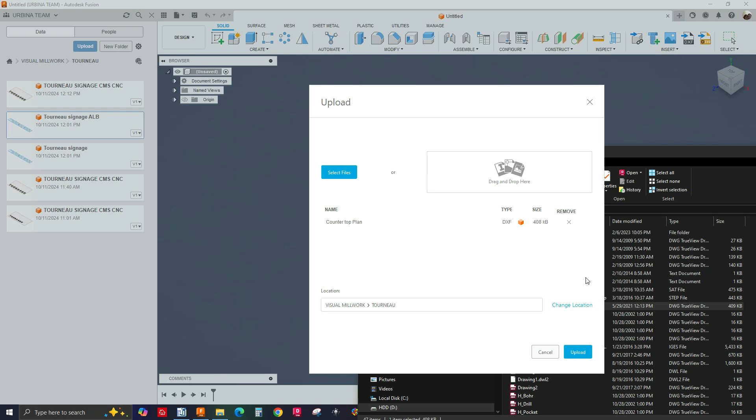Or you can just go to the folder where you have DXF files. I have one right here, let me move this window to the left. You can just drag and drop it, click upload, and you can see it here.

So you've got to give it some time, depends on how big the file is, so just give it a few minutes. You also have to have internet connection for this to work. You can also see it upload.

So I'm going to right click and delete, I'm not going to program that one. I'm going to program this one instead. You can also import DXF files by going to Insert DXF. If you don't see this icon here, you can just click on this arrow and go down and select Insert DXF.

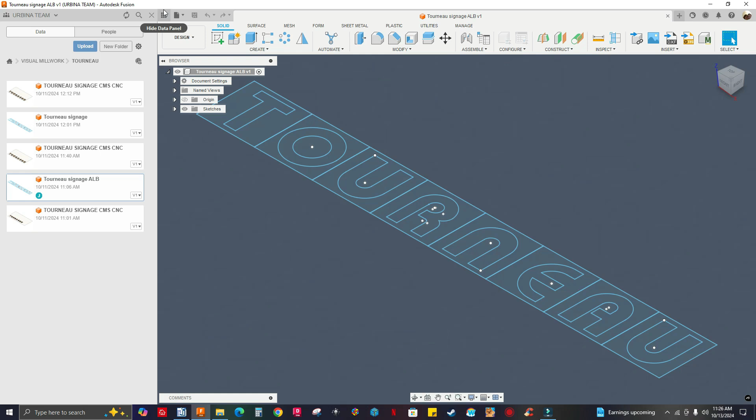Let me right click and open this DXF file. See, it's assigned. The first thing you want to do is right click up here and go down to Capture Design History.

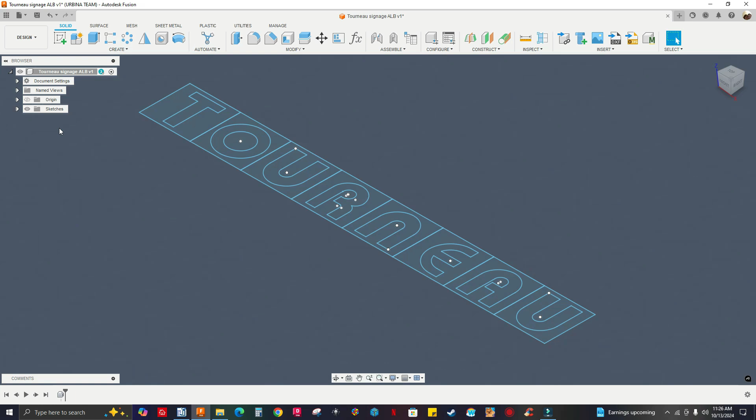Now you have a timeline at the bottom of your screen, see that? Now I'm going to turn this into a 3D model. See, I have the sketch turned on. You can right click and rename this sketch if you want.

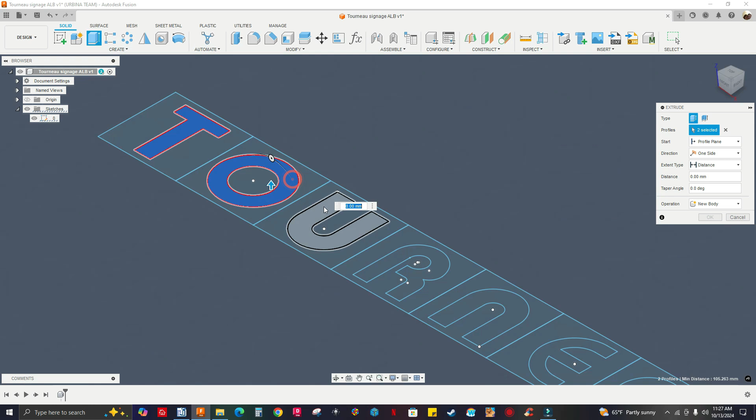I'm going to select extrude, select the T, the O, the U, the R, the N, E, A, U, and make this 12 millimeters, so I'm going to type 12. Operation is going to be new component. Click OK, there's my component.

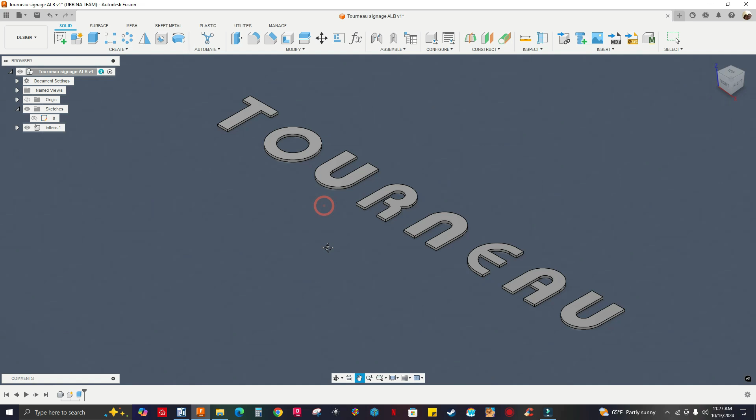You can name it if you want. So I'm going to name this letters, and there you have it.

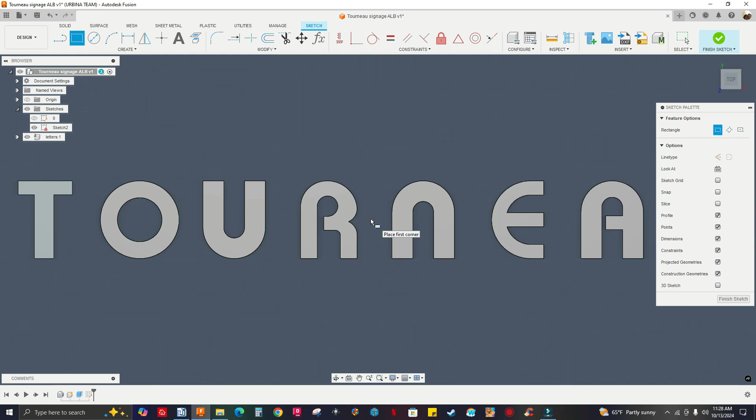Now I want to cut this out of a 12 millimeter MDF, but I want to model the stock. So I'm going to select create sketch, or you can hit the R key on your keyboard for rectangle. I'm going to select this top face of the T, and see, I don't see the letters anymore, so I'm going to hit F7 on my keyboard, and there you have it.

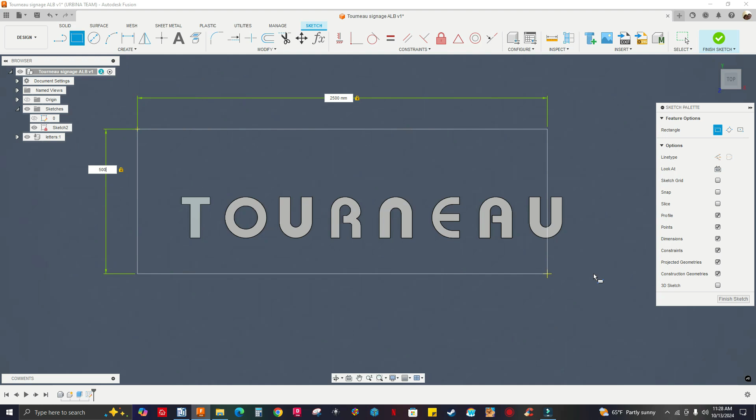I can just zoom out and draw stock here, and I'm going to make this maybe 2500 millimeters by 500, and hit enter. That's the size of my stock, and I can just select this point or drag it down here to position the rectangle right there.

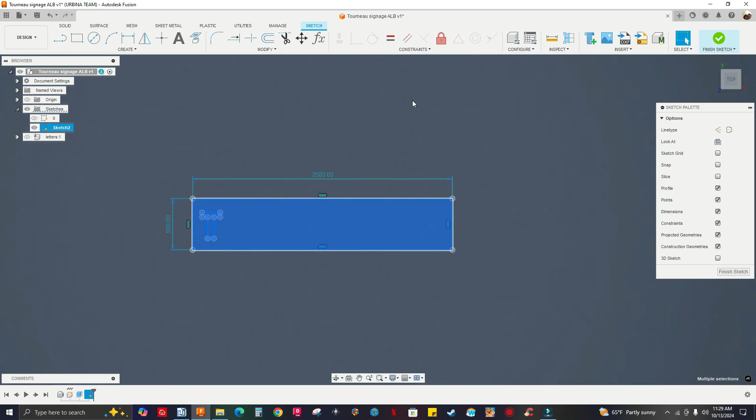Now I'm ready to extrude that rectangle, so I'm going to turn off the letters component, and window select that rectangle, and hit the E key on my keyboard for extrude. I'm going to type minus 12 millimeters. Operation, new component, click OK.

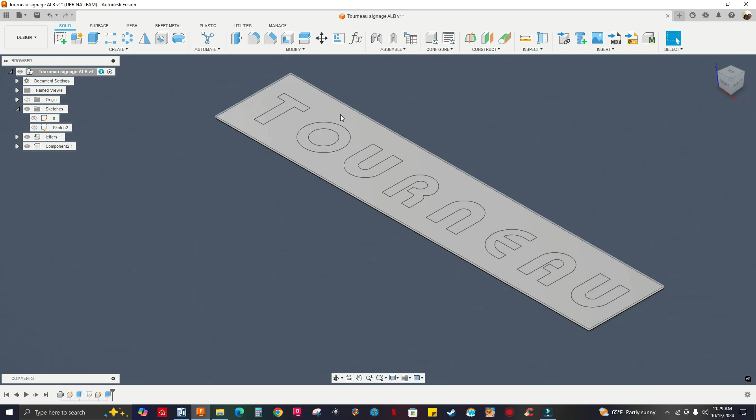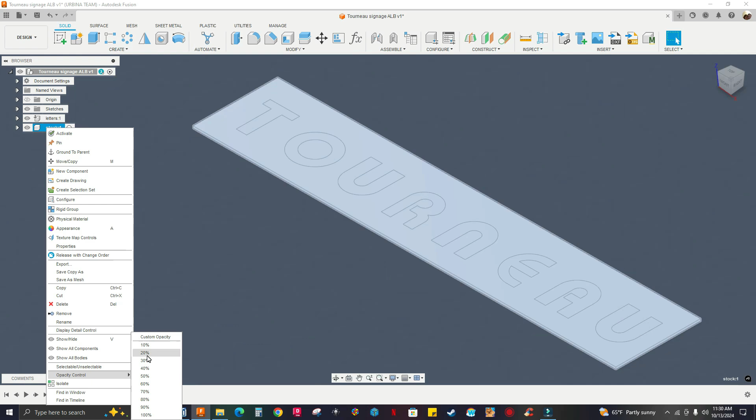You see, now I have the letters and the stock. Select that second component, and I can name this stock. There you have it. If you want to make the stock transparent, select the stock component, right click, go down to opacity control. I usually use 20%.

There you have it, it's transparent. So I'm ready to program this job. I'm going to go to the manufacturing workspace and create a new setup.

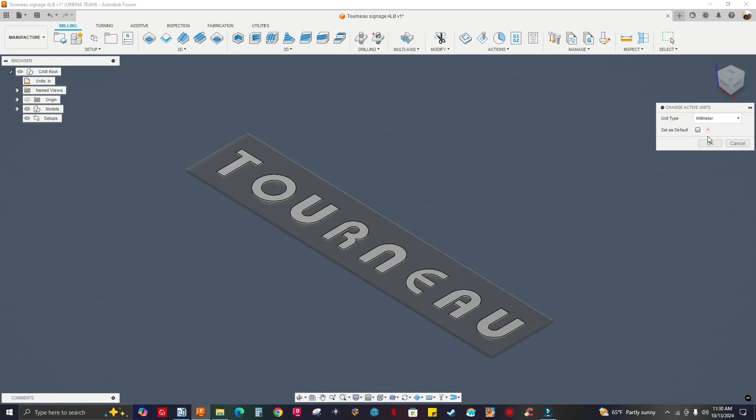Okay, my workspace is in inches. I'm gonna change it to millimeters. Click OK. Select setup to create a new setup.

Operation type set to milling. I'm gonna go down to model, click on select, and select the stock and the letters.

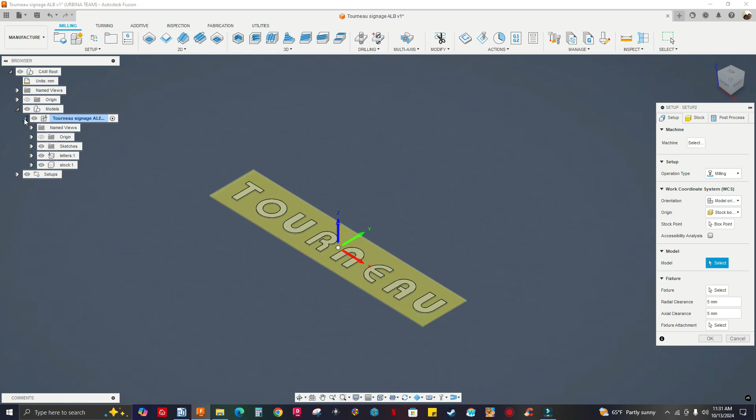The easiest way to do that is right next to models, click on this arrow. Got the components here. Right next to it, click on this arrow, and select letters. Hold down Shift, select stock. So I got everything selected.

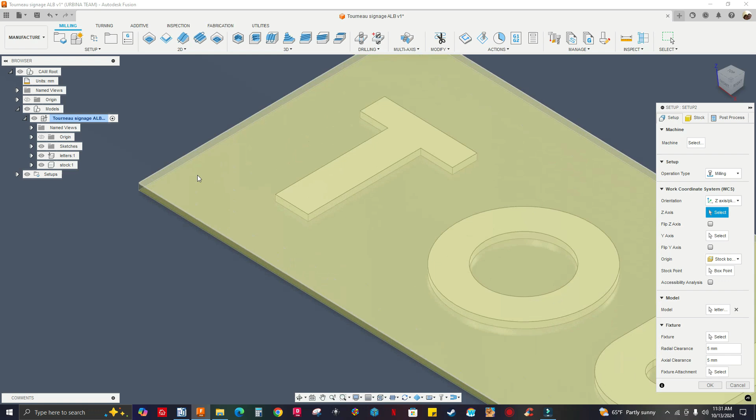I'm gonna go back up here where it says orientation, and select Z-axis plane and Y-axis. My Z-axis is gonna be this face right here with the stock, and my Y-axis is gonna be this edge. Oops, select the face.

Click on this X to clear that out. I'm gonna select the edge here. Go down to stock point, click on box point, zooming in. Select this point right here.

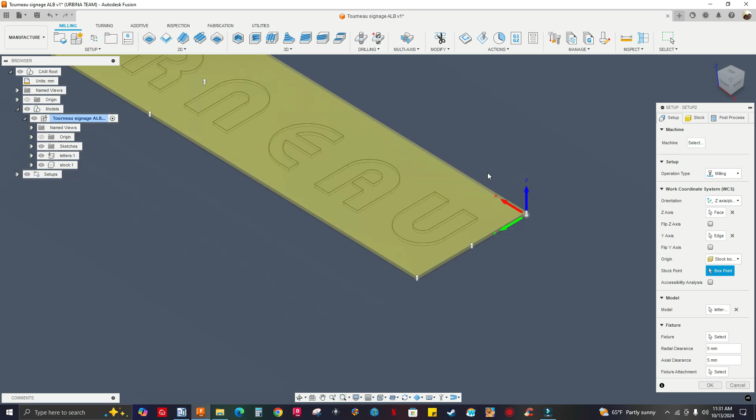But you see how some material is being added to the stock. If you zoom in, you see it's probably like 1 millimeter, maybe a little less. So I'm gonna go to next tab, which is stock. See, I got 1 millimeter, so I'm gonna set size to 0.

Side - see, stock side offset 0, stock top offset 0. Okay.

If you click on these three dots, you can save this as user default if you want. If I click on this arrow, I can select no additional stock. And you can click on these three dots and save as user default if you want.

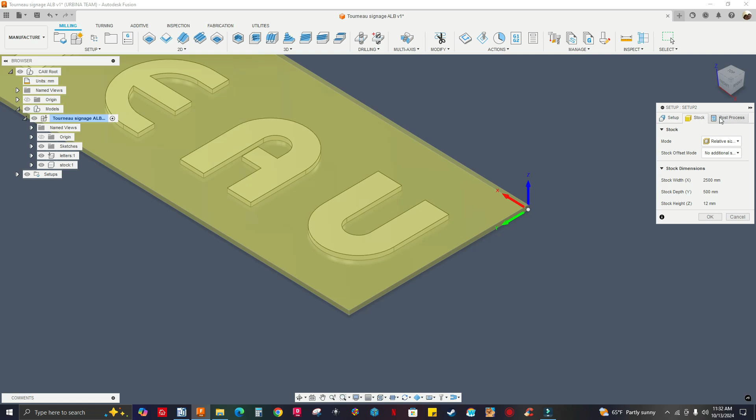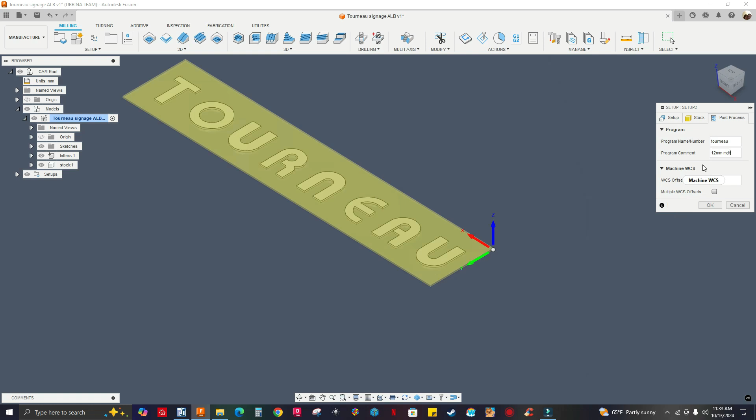Next tab is post process, and this is where you name the program. I can name the program Tourneau, TOURNEAU, and I can put a comment here. I can say 12 millimeter MDF. Okay, and I'm gonna click OK.

This is my setup. Okay, now I'm ready to create a toolpath, and I'm gonna use a 2D contour. I'm gonna do a profile cut. I'm gonna cut the letters out. So I'm gonna go to 2D menu, 2D contour.

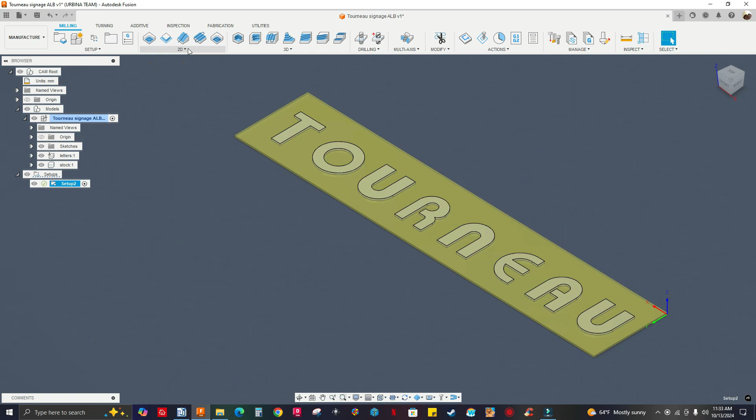I'm gonna select my tool. Okay, I've got the Weeke. I also have - never mind. I thought I had the metric Weeke Optimat BHC 350, but only have inches. So that's why I'm gonna select a 3/8 compression tool.

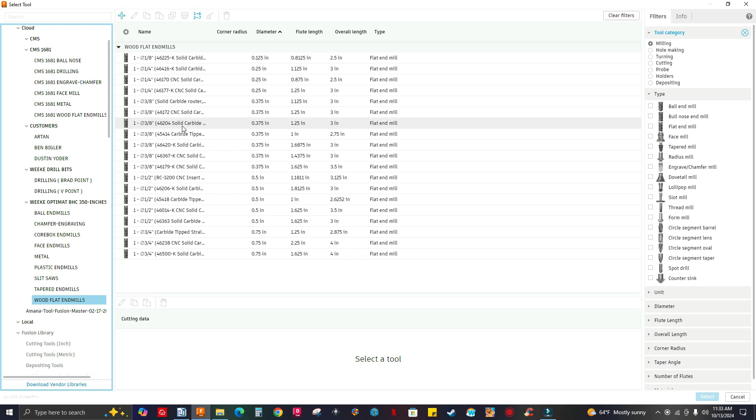I'm gonna select this guy right here. I got all the feeds and speeds set up for that tool. So I'm gonna go to geometry.

I'll have to select the geometry, right? All the letters I want to cut out. But you see, I can't do that because I have the stock component turned on. So I got to turn that off because it gets in the way.

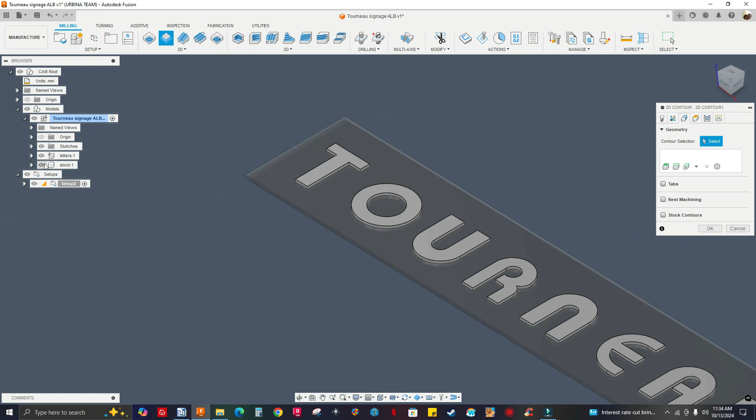So I'm gonna go here where it says stock. Click on this icon, you see like the eye icon. And see, I just turned off the stock.

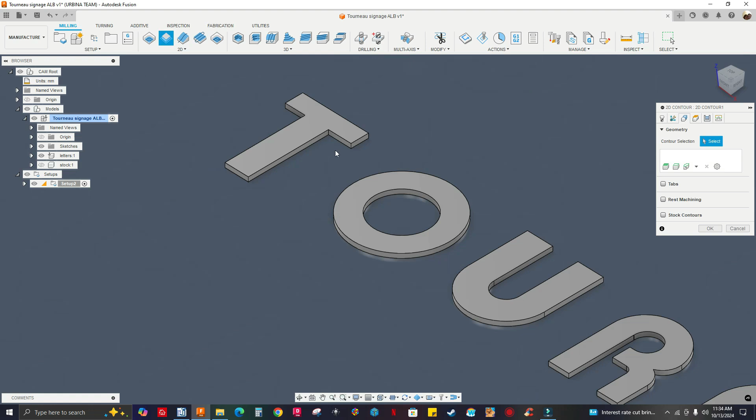I'm gonna select face contours. You can also select chain if you want, you can do that. Actually, click on cancel - you can just select each profile like that, one at a time if you want. But the easiest way to select everything is by selecting face.

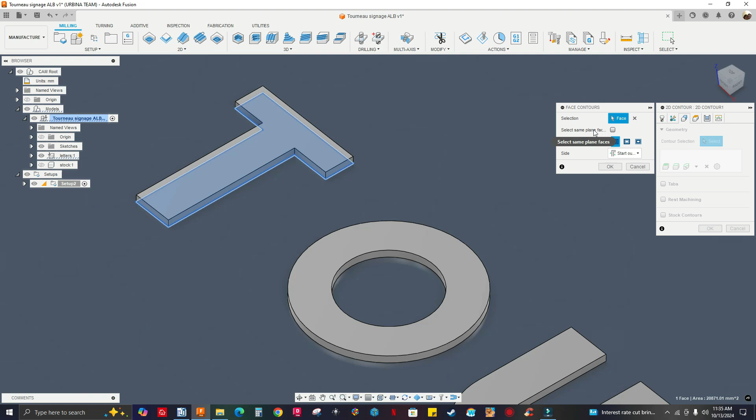I'll show you. So I select face contours, and I'm gonna rotate the model. Select this bottom face. Okay, and see where it says select same plane faces, I'm gonna check on this box. See, selecting everything else, but I don't want the stock to be selected.

See that? So see, I have all loops selected. I'm gonna go to outer loops - that's not what I want. Inner loops - that's what I want. I just want the letters to be selected.

Okay, and see, you have different side modes. You have start outside, start inside, always outside, always inside. Okay, so I'm gonna click OK.

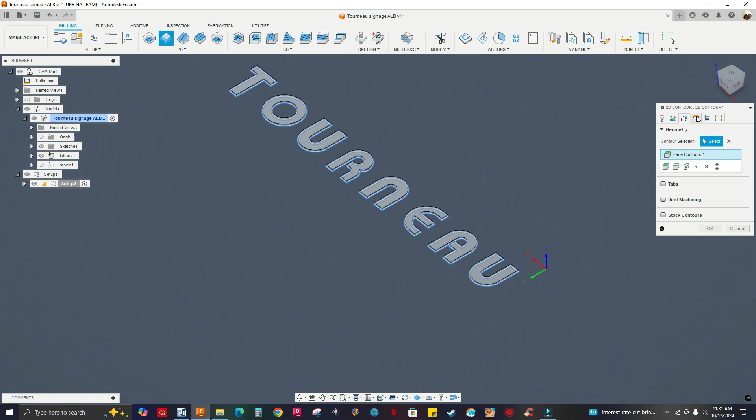Next tab, heights. I want to cut through, say I'm cutting this on a flat table, Homag or Weeke CNC machine. So I'm gonna go half a millimeter, type minus 0.5. Okay.

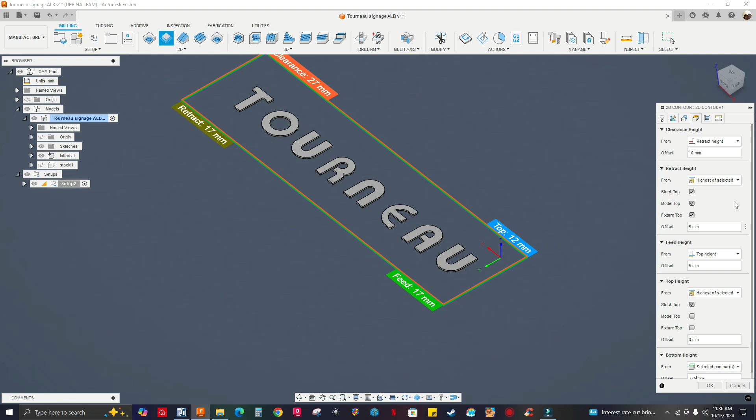Okay, so under passes, I'm gonna hit a step down. So multiple depths, check the box, and I'm gonna have a 7 millimeter step down. Finishing step down should be the same, 7 millimeters. Okay.

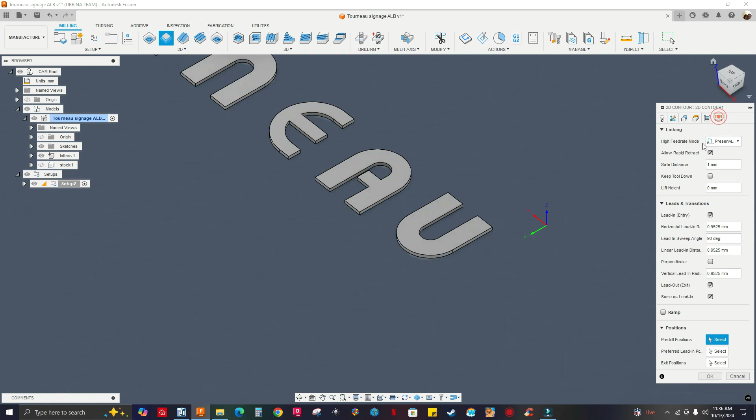In the Linking tab, I'm gonna uncheck lead in and lead out. I'm gonna use a ramp, a 15-degree ramp. Ramp clearance I set to 2.5 millimeters. I can make this 1 millimeter. I'm gonna click OK and see what we get.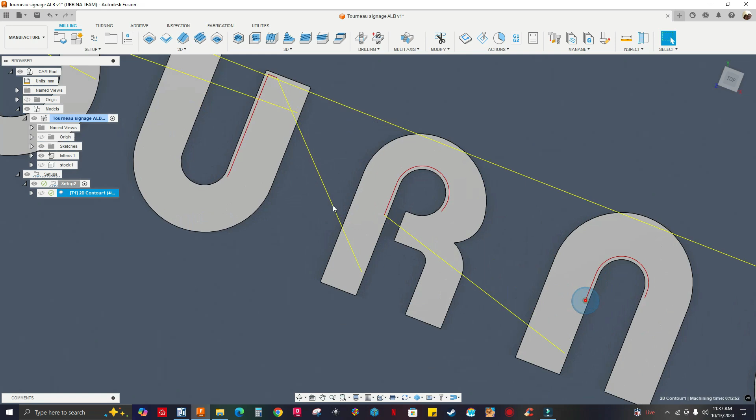Okay, you see that? So the machine's gonna cut into the letters. See, it's inside, the tool compensation is inside the contour lines. Let's fix that.

I have 2D contour selected. Right click, edit, go to geometry, face contours. Right click, edit, side, select outside. Click OK, click OK, and there you have it.

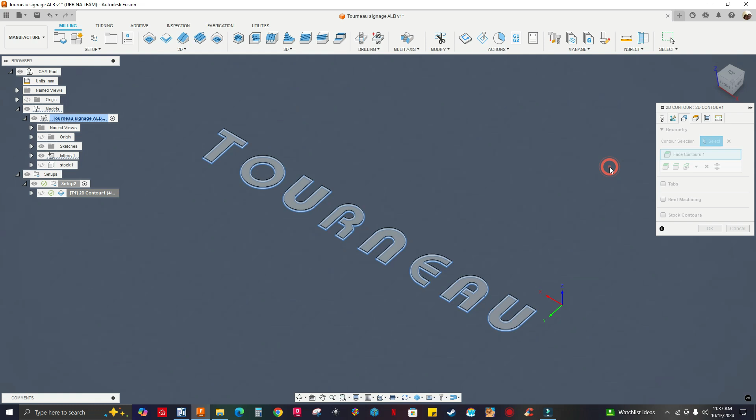This is the toolpath that I was looking for. Put it on top view. I'm gonna right click, simulate, and play it. Okay, that's what I want. See that?

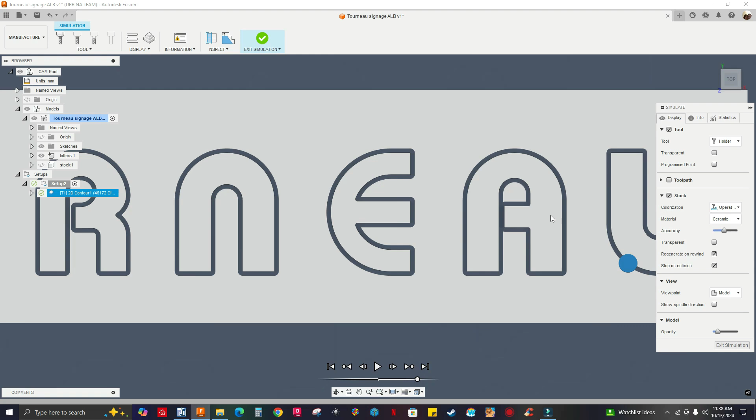Let's say you don't want these little parts to be flying off the machine. We can also add tabs to keep these little pieces in place, and this piece right here as well, just to make sure it doesn't fly off the machine. Let's do that right now.

Back to the contour, right click, edit, geometry, tabs. Check this. So my tab width, I want it to be 7 millimeters. My tab height, I want it to be 2 millimeters. You have different tab positionings, you see that by distance, by numbers if you want.

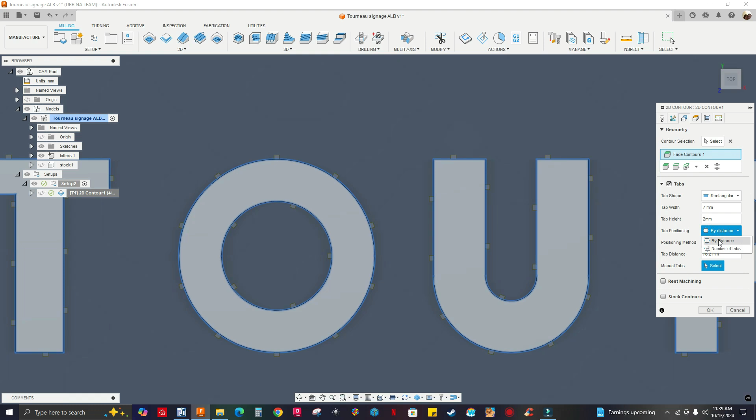I'm gonna select my tabs manually, so see where it says manual tabs, select. I'm gonna zoom in, select number of tabs, yeah that's what I want. Okay, so that'll be 0 here. Yep, this has to be 0. So I'm gonna select this right here.

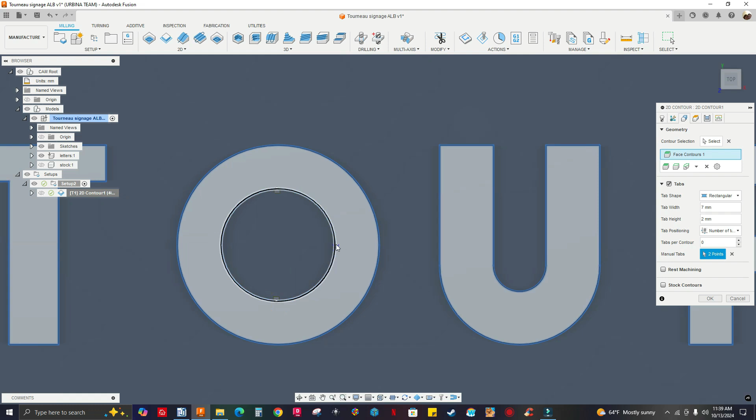This line and this right there. I want to have 2 tabs here, so one there and one there. I'm gonna zoom out and go to the letter A. So I want to have, let's say, 4 as well - one here, one there, one there, and one there. I'm zooming out, I'm gonna click OK.

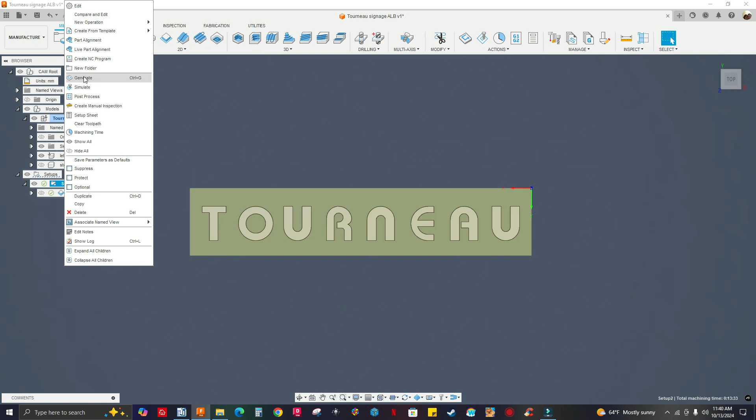Right click and simulate. I'm gonna play it. Okay, and there you have it.

All right, so I'm ready to post process this program. I'm gonna turn this into an MPR file. But you guys are new, so you gotta make sure you download the WoodWOP post processor from the Autodesk website. You gotta download it and make a couple of changes to it in order to make it work, otherwise you're gonna have an error and won't be able to open the MPR file in WoodWOP. I have a couple of videos on what changes to make for the WoodWOP post processor to work, so you gotta check those videos out. All right, so I'm ready to post process.

Right click, post process. This is a post processor for that flat table CNC machine that we have at work, this one that I've been programming and running the most. It's just a better machine than the Weeke that we have because it has a tool changer, it has a better build. So I haven't programmed and operated the Weeke CNC machine for like 2 months now. This is my main machine to go to.

So I'm gonna have to select the post processor in millimeters, I have right here. And I got my folder selected, and I'm gonna post it. NC code successfully posted. See that?

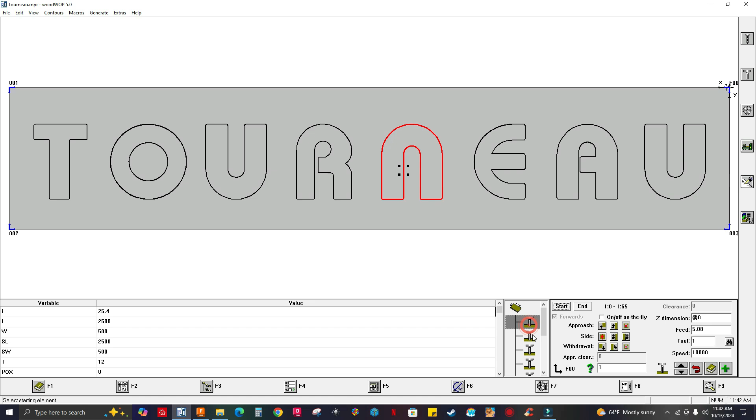See, see all the routing macros, or vertical trimming macros, that's what they call it in the newest version of WoodWOP, right? Okay, so there it is. That's how you turn a DXF file into an MPR file. It's not that complicated, all right.